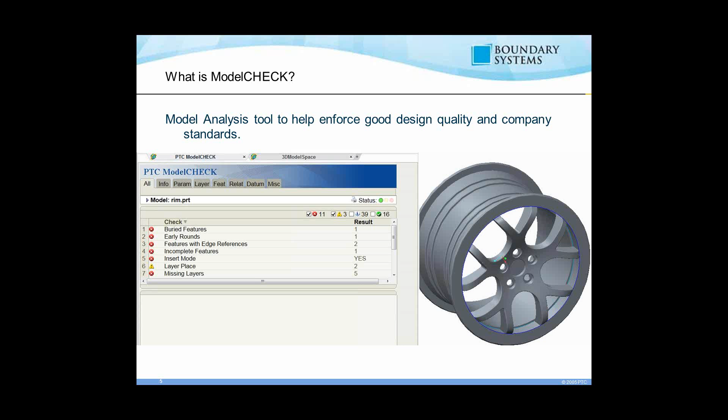So that way, issues that you need to fix or take a look at, it'll begin to highlight those, and that gives you an idea of what to fix and what potential issues are in your model. Now, that then begs the question, why even use or consider Modelcheck? In general, there are 3 major reasons to use it. The first is usually going to be company standards violations.

That's a case where we know companies that are trying to enforce certain standards on how they model, how they store information in their CAD files, and they want to enforce that across the entire user base. So it could be something as simple as naming and populating parameters correctly, because the company knows, after you make your CAD file, we check them into our PDM system.

Well, if half the engineering department have a parameter called part number, and the other half call the same parameter PN in their models, then it's going to be fairly difficult for the PDM system to search by part number, because they're different parameter names for the same entity. So something as simple as that, where Modelcheck can check and make sure that it's the same company standard template across the entire CAD file database. That way it facilitates sharing.

Another reason to use it is when it comes to poor modeling practices. Modelcheck can not only check for standards, but it can also analyze your CAD model for any potential issues that could cost you time or money down the road to fix. That could be due to round children or buried features or things like that. It quickly analyzes the model and highlights those for you, so that way you can go ahead and fix those.

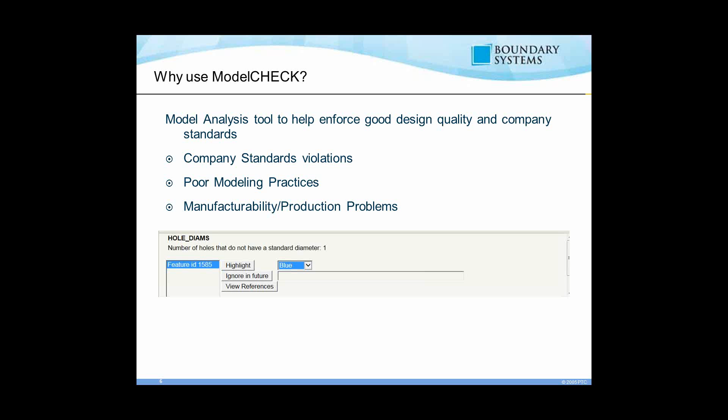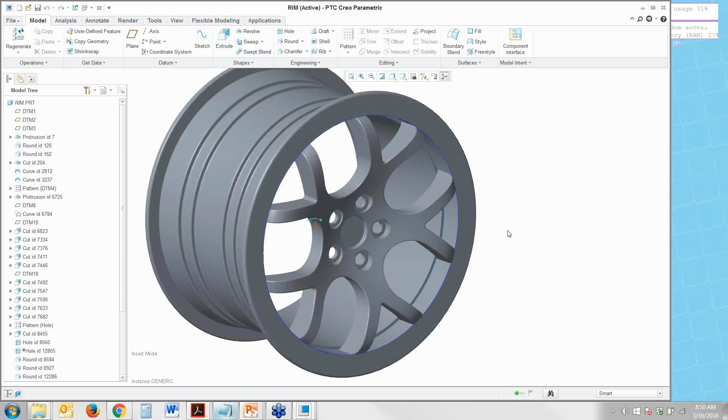And so at this point, I'll pause here and flip over to a demo of Modelcheck. All right. So in this case, actually, let me show the full model here. This is an assembly model. It's a fairly small, simple assembly model, but it illustrates the Modelcheck point very well. The first thing we're going to do is open the rim and show Modelcheck operating from a part level. In order to run Modelcheck, you can go to File, then Prepare, and then Modelcheck Interactive.

Now I know many people mentioned that you need some help configuring Modelcheck. The first thing I'll mention is that the default installation of Modelcheck comes pre-configured with some sample checks already turned on. I say sample because it's just an illustrative sample, and it may not be everything your particular company needs. But if you've never configured Modelcheck at all, and you go right now to your Creo installation and click on this button, Modelcheck will run and analyze your model based on the sample checks that have been pre-configured. A lot of times when people configure Modelcheck, it's really just looking at the sample checks and saying, okay, yes, we want to keep this, no, we don't want this.

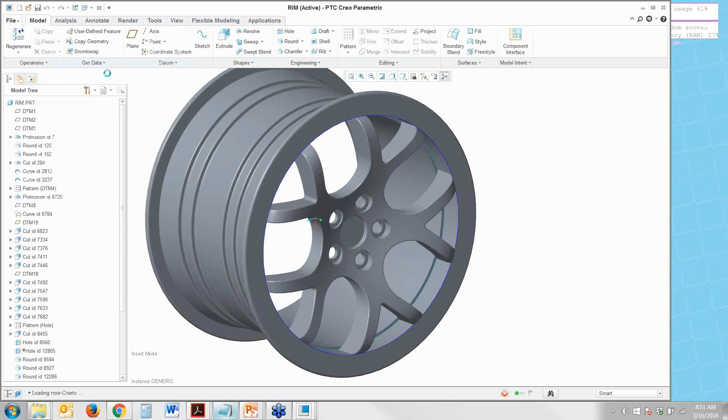And so I'll go ahead and run Modelcheck now, and it comes back with a report. And you'll notice it has a ton of different things that it checked for. In this case, there are over 60 different items. Some of them are just information warnings. Others are checks that it looked for, and the model passed those checks.

And so we can begin to then analyze this and see, okay, what's going on. So the first bucket that I mentioned here was hole diameters, right? So this is one where it's not all bad in this model. Modelcheck analyzed all the holes in this model and said, okay, all the holes in this model have standard diameters based on the hole sizes that we have. Now that hole size chart that Modelcheck is checking against is something that is fully customizable within each implementation of Modelcheck. And so if you have different hole sizes, you can customize that for your own company.

Now for the other two buckets and the other ways that Modelcheck analyzes models, it has either errors or warnings. Typically errors are issues that more likely than not will cost you some time or money to fix, either currently or later on down the road. So those are glaring issues that are a cost to the company, basically. And then warnings are things that may not be glaring issues, but you may want to fix because it helps enhance good modeling practice.

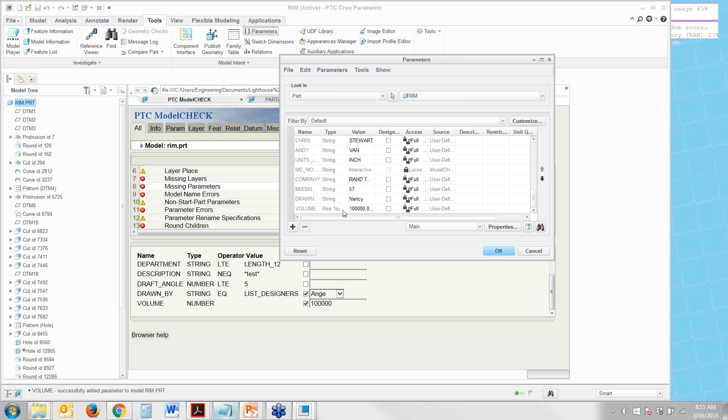Let's see here. Volume, we'll say let's manufacture, I don't know, 100,000 of this. And we'll say add, and you'll notice it added both of those parameters successfully to my part. Let's see here. Yeah, it doesn't have the one from my designers there, but I can very easily go ahead and check that. Say parameters. Yeah, there it is, drawn by Nancy, and the volume now is 100,000.

So other company standard issues could be things like layers. So we know, for example, that all of these layers are things we require in our company standard CAD files, and those don't currently exist, and we can add all of them to this model.

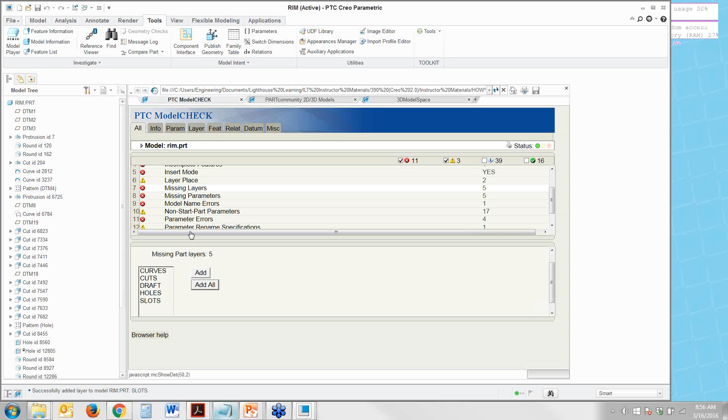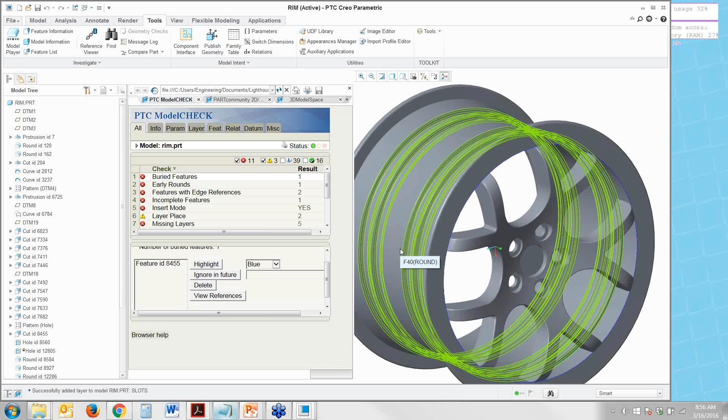Now, the other big bucket of issues that Modelcheck analyzes for is poor modeling practices. And so typically in that vein, we go here to things like buried features, for example. And so this lets you see, if I make this in half so I can see the model. So this shows you here, for example, if I pick on this feature and highlight it, you'll notice Modelcheck pops it out in the model, and I can very clearly see, right over here where those two blue circles are, there's a buried feature right there.

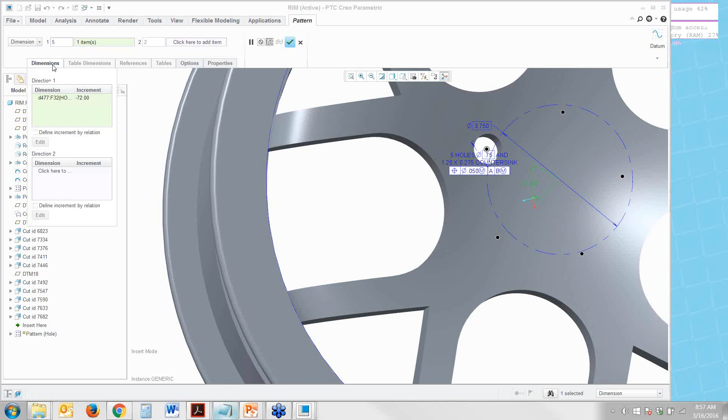Now that looks like it's part of a pattern, and so I can go ahead and pick on that pattern and begin to investigate where it is and start to fix it. Okay, so actually there's a reference pattern of that, and for 5. Actually, let's do it this way.

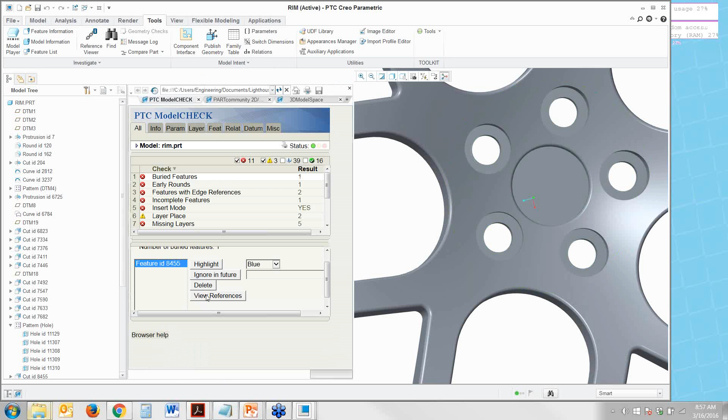With Modelcheck, all I'll need to do here is say view references. Yeah, there we go. Okay, there we go. And it basically pops out the reference viewer and shows us which feature it is in Creo. And so in this case it's cut ID 8455, and so I can very clearly see here that's more than likely going to be this guy right here.

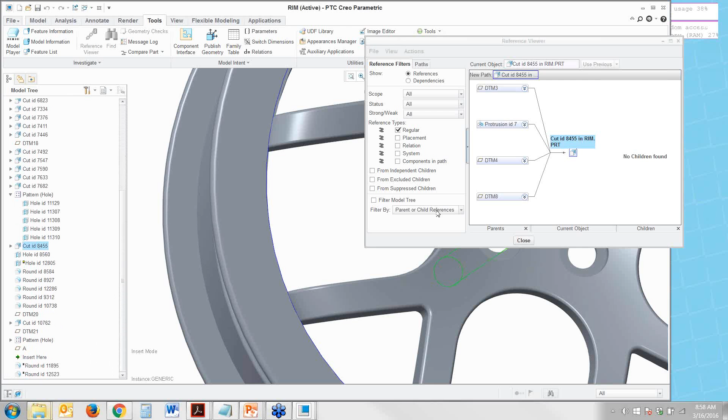Yeah, so that's an additional hole that didn't need to be there, but it's basically on top of another hole. Now, other issues that Modelcheck will pop out when it comes to bad modeling practices will be things, for example, like early rounds. So this is usually an issue because rounds can easily be suppressed. And so in a case like that, when you suppress a round early in the model, then it could cause other features to fail. Or when you have features with edge references, well, if that edge goes missing or is rounded off, then those features will fail to regenerate.

Or if you have round children, again, likewise, if you suppress a round, because typically rounds are added as finishing features at the end, and so if they're ever suppressed, then any round children will also fail as well. And so those are some of the simple things that Modelcheck will highlight for you to pull awareness to that in the model.

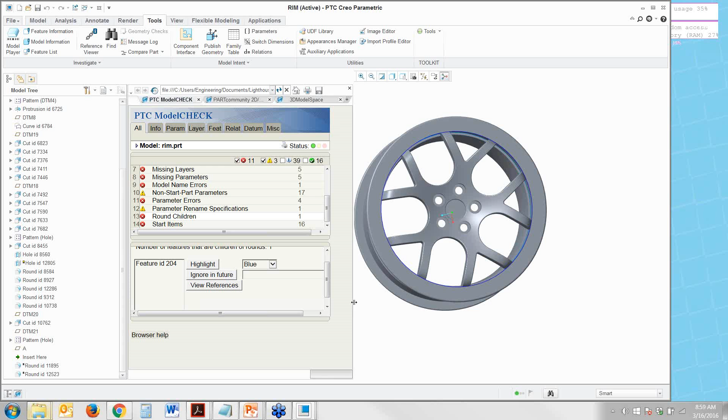And so at this point, I'll switch over to a different model we have, and in this case, this is a rotor, and I'll show a different way that Modelcheck works. So over here, you'll notice if I want to go ahead and run Modelcheck, there are a few different options here. First is Modelcheck Interactive, and the other is Regenerate. And then there's also Rule Check and a Geometry Check as well. So we'll go ahead and tackle the first two here.

So for Modelcheck Interactive, that's where you click and have Modelcheck run on the fly and generate a report for you. Modelcheck Regenerate is where, while you're modeling yourself, whenever you regenerate, it'll analyze the model. And so the key to that then is you don't want it to always pop out a list of 12 or 15 different errors like it did in the case of the rim. But while I'm modeling, if I have one or two issues that I just unintentionally created for myself, Modelcheck can pop out and tell me that while the model regenerates.

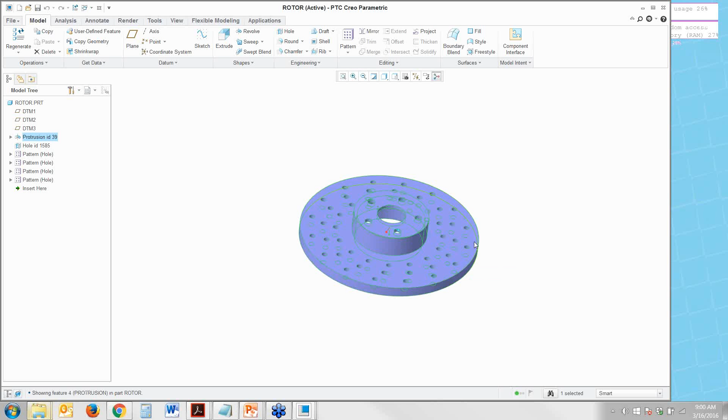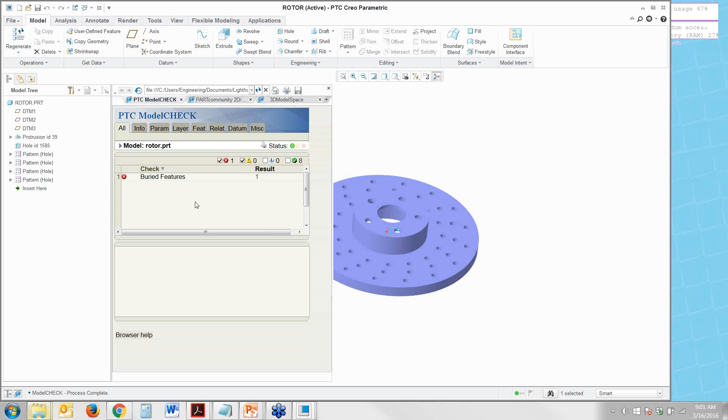So for example, it could be something as simple as this right here. So if I edit this here and I say, let's make this dimension 0.75, and I go ahead and regenerate, you'll notice it pops out and says there are buried features. Now all I did was click on the regenerate button and it pulled that out. And if I go here and I analyze this model, actually let me pull this out and do that. Buried features. Let's highlight that. Okay, so that's over here.

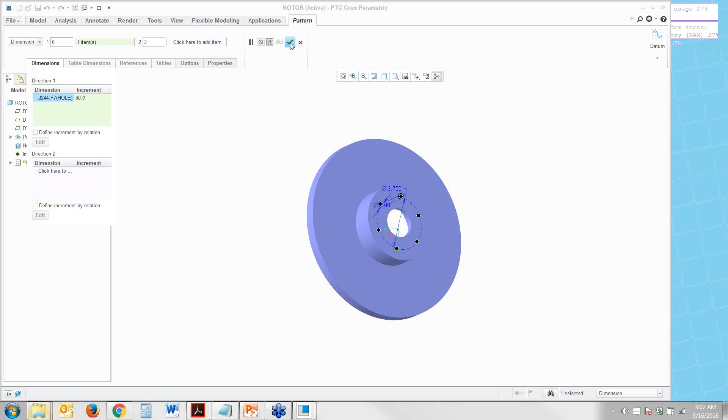And now if I go ahead and take a look at that model, let's edit that. Okay, yeah, so I'll see here that is a 6 feature hole pattern that increments at 72 degrees, and hence one hole is on top of another. And so if I quickly change that to 60 degrees, accept, and now you'll notice it just regenerated, and Modelcheck didn't pull out any errors. So I regenerated again, and it says here Modelcheck process completed successfully, and it didn't pull out any errors.

And so there are different ways for Modelcheck to run. One is you go click and ask it to run. Another is while you're modeling, whenever your model regenerates, or sometimes whenever you save the model, then it'll analyze and pull out a smaller list of issues that you need to fix, glaring issues that you most definitely don't want to save, or you don't want to continue modeling long term with those issues in there.

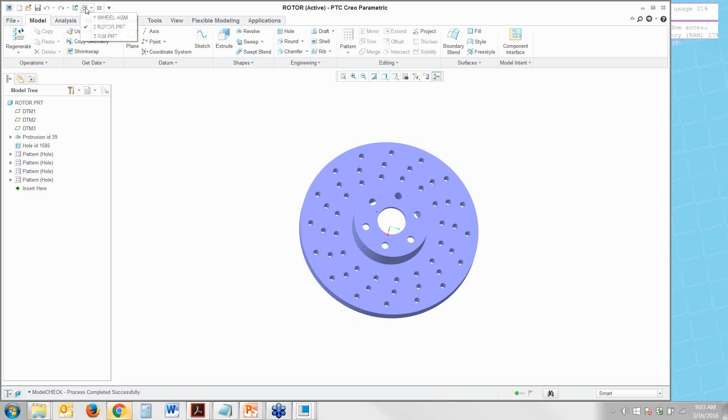Now the next category of things to look at in Modelcheck will be looking at it from an assembly level. And so from an assembly level, I'll notice this is an assembly of probably at least 10 or 15 parts. And you can very quickly come here to Modelcheck and say, let's run a report. And you could do it a few different ways. You could do it on a specific component, or only the top level assembly, or you could run it on the top level assembly and every sub-assembly and component as well.

And you'll notice even for an all level check, it ran in less than a second, and it pops out. And now I can look at issues that occur on the assembly level, like right here. So I can see where generic components are being used in an assembly, which is not advised as best practice. And we can also then take a look at the checks on a per level basis.

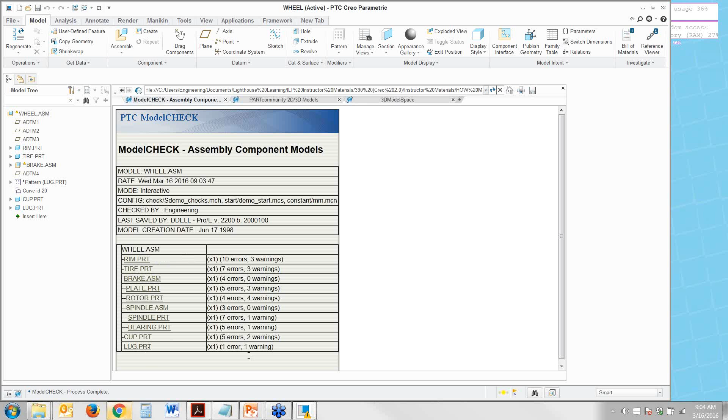So for example here, this pops out all the different components and sub-assemblies and the number of errors or warnings in that model. And so I can go ahead and, for example, click here, and I can see that for this lug model, one of the warnings here is a duplicate models warning. And when I take a look here, I realize, okay, there's another model called lug released that's on my computer that matches that model by about 78%. And when I look at the number of features and the overall size, for the most part, those two are a fairly identical match.

And so this then begs the question, are you building something unique, or are you just rebuilding an already released CAD model that everyone has agreed upon in the company? And if so, why not use the released version instead of having to recreate something that then has to be approved and vetted and then released? Right. And so these are some of the issues that Modelcheck can catch, and this is one of the huge reasons why it's very, very beneficial.

And so at this point, I'll pause here with this, and we'll flip back to our PowerPoint.

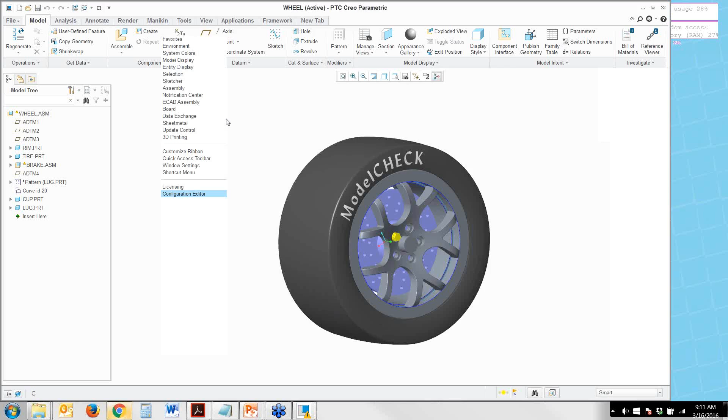So the answer to that is yes. Yes. If I go to my computer here, so you can see my screen. Let's see here. Okay. So if I take a look at my config.pro that I currently have running this session, yeah, wheel parts,

there are a couple of different config options that are Modelcheck specific. The first is Modelcheck enabled, and usually you want to set that to yes. And so you can have this option in a config.sup. The other is Modelcheck dir, and this points it to the directory where your Modelcheck configuration files are stored.

Now, almost as a quick tip, when it comes to configuring this for Modelcheck, this particular config option was added in Creo 2. But in the earlier date codes of Creo 2, this was limited to a very small number of characters. And I want to say it was probably limited to maybe 20 or 30 characters or so. And so if you had a path with more than that, it would ignore it, which was very frustrating.

And so in the later date codes of Creo 2, and I forget which date code they actually switched it, they increased that path. And so if you see here, for example, I'm currently using Creo 3, and my path is definitely longer than 20 characters. And Modelcheck dir points to that new directory. So with those two set, that will turn on Modelcheck.

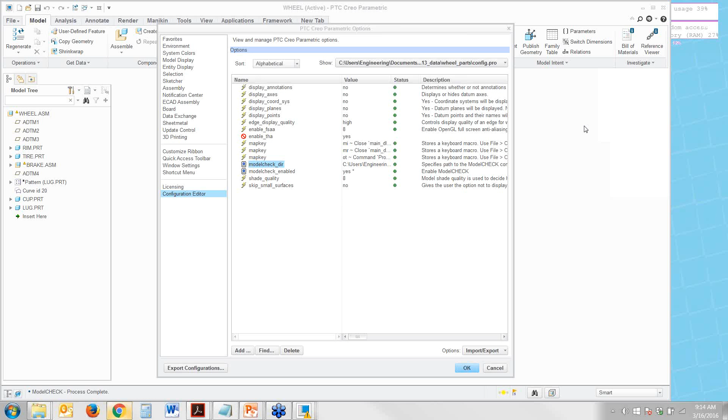So first off, when it comes to model check, there are a couple of different things. First off, we have services where we can configure model check for customers, and so that's one where customers come to us and say, "Hey, we don't even have the time to figure this out. Can you guys configure it for us?" Knowing that these are a list of things we want to check for or enforce.

And what we found when it comes to that is typically buy-in from basically everyone in the company has to be there, or at least buy-in from the key decision makers has to be there in order for you to use model check. So in other words, forcing model check down people's throats sometimes may not be the best approach, because then people would basically rebel against it. That's purely coming from a user standpoint.

Now when it comes to implementing it, usually the way we approach it is first off determining what are the things we want to check for, and then from there taking a look at the model check checks and see what are the checks that will enable this to happen. So sometimes it could be just a simple check directly, sometimes it could be adding some conditions to checks

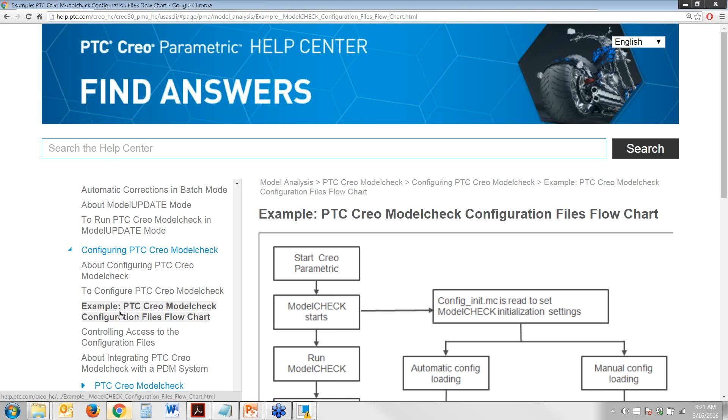Yeah, so this particular flowchart is one that I usually recommend to customers that want to figure it out on their own. Basically, it very quickly describes a lot of the things you need to do in order to configure Modelcheck. So everything from the initialization file, which is the very first thing it reads whenever Modelcheck starts, to, if you're automatically loading the configuration files, then it's going to read in the condition.mcc file. If not, you can set those files manually yourself.

And then basically that condition.mcc file tells it which check file to use, which start file to use, and then the constants file, and the status file as well. And so from a high-level overview, the help files provide a pretty good launching pad to configuring Modelcheck yourself as well.